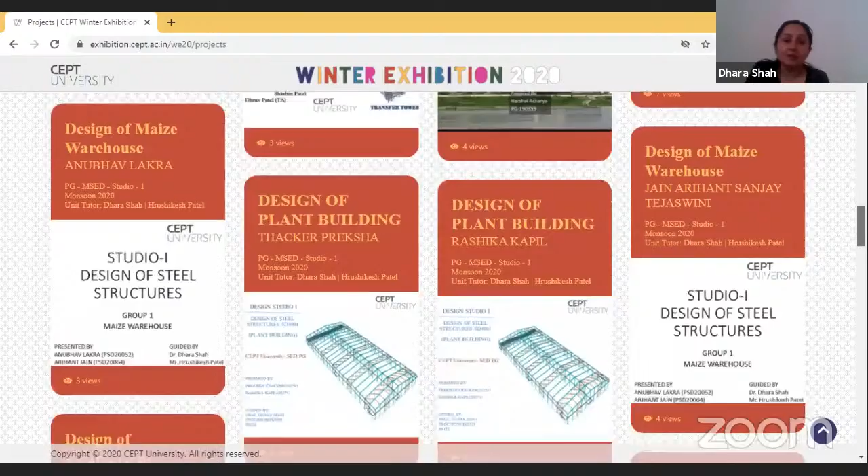Let me just brief out the objective of these two studios. Starting from semester one, studio one has been aiming to provide the students with knowledge and skills to design basically industrial steel structures with the latest Indian Standard Code of Practice for general construction. Students apply their own knowledge from strength of materials and structural analysis for further understanding between analysis, selection, and design of structural steel elements and their connections.

So basically, the project is given in a group of 2, wherein students are supposed to read the architectural drawings, prepare the structural system, and then calculate the loads going onto those industrial buildings, and then load combination analysis and design, as well as preparing the structural drawings, I mean the fabrication drawings, which are going to speak on their behalf onto the site. So the first semester is basically dedicated to design of industrial structures, and a few of the projects also included gantry girders. And so let us begin with the student Anubhav.

Anubhav, are you there? Yes ma'am, good morning. Yeah, you can share. Anubhav is from first semester who has gone through Studio One. So he will be presenting what they have gone through in Studio One.

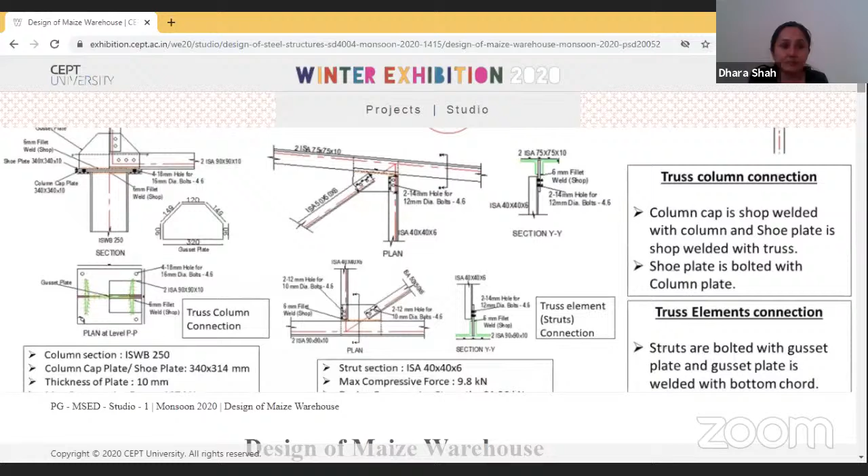Good morning, everyone. We are here to present our work done in Studio One. Me, alongside my partner Arihant, were assigned to design a maize warehouse, and during the course of our project we were guided by Dhara ma'am, Hrushikesh sir, and our TA Poojan Patel.

We were assigned to design a maize warehouse at location Ahmedabad, and we have been provided the architectural plan of 20 by 100 meters for the same.

Our location was Ahmedabad, and seismic zone accordingly is 3, and wind speed was 39 meters per second.

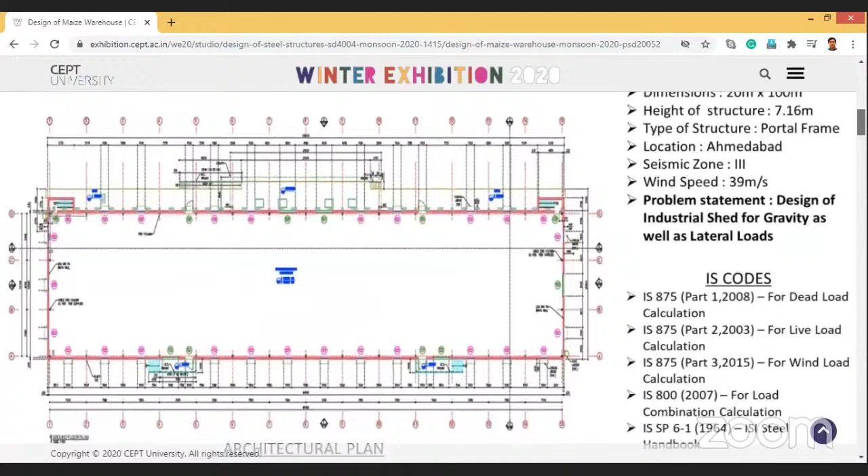As per the architectural plan, while preparing the structural layout, we first needed to carry out the structural layout for the same, keeping in mind various critical openings such as door at the gable ends, shutters and windows. Accordingly, we placed the columns at equal distance, that is 7.08 from grids and 7.114 at the gable end.

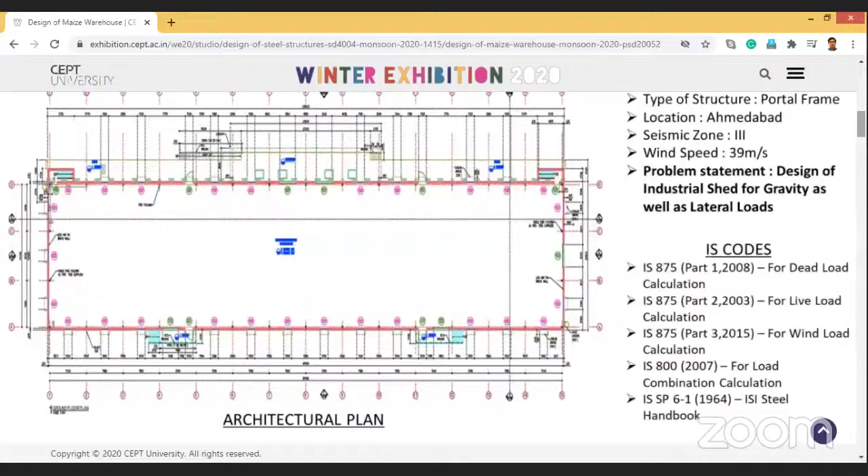For the same, here we have shown our center line plan at the base level, at the eave level, where we have tie beams connecting various portal frames, and bracing and purlin position at roof and gable end.

We can see here our center line plan at base level, at eave level, and bracing and purlin position in the plan accordingly.

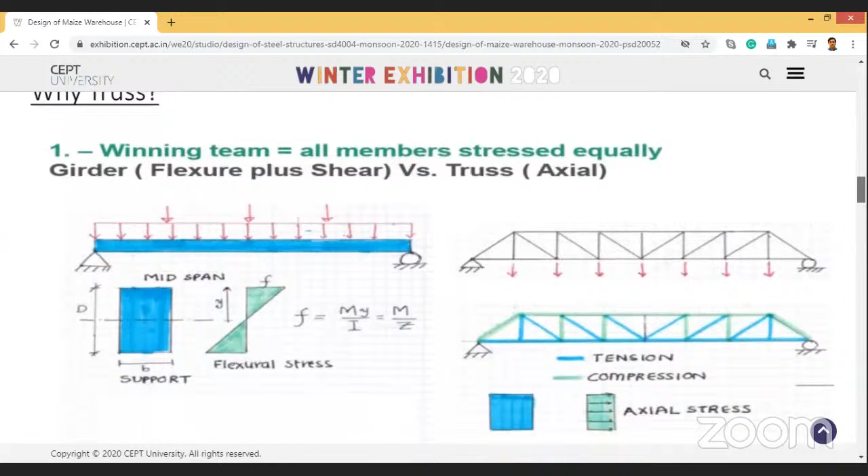Now we were asked to make some changes from our provided architectural plan, so we went for truss rather than a portal frame.

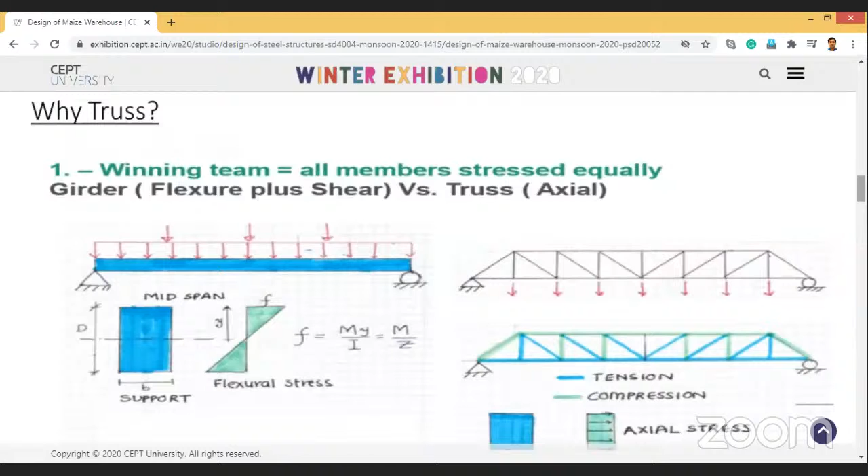The main reason was that for a normal portal frame girder, when it is subjected to a load, it experiences maximum flexural stress at mid span, as we can see in the figure over there in the diagram.

However, in truss, all its elements take up either tension or compression, and hence its axial stress distribution is uniform, which can be seen over here. So all members act as a winning team, and therefore we have opted for truss. Also, truss is lighter compared to a portal, hence it would be economical for larger spans, as in case of our project.

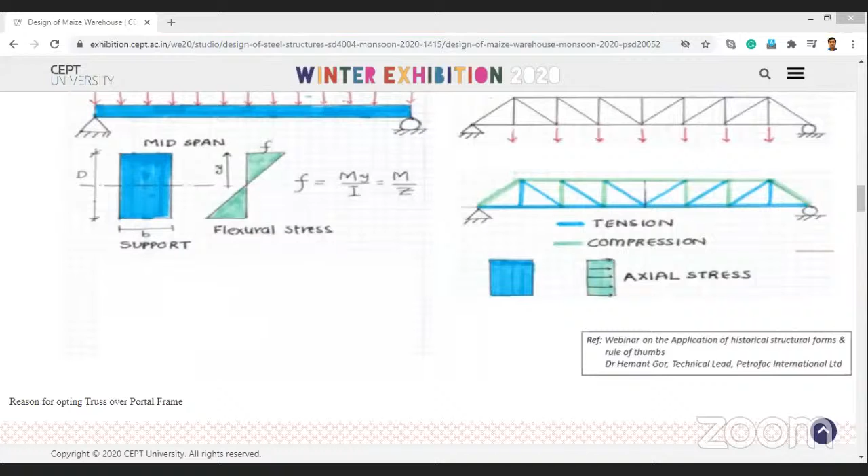Next slide, please. Further, we needed to calculate dead load, live load, and wind load.

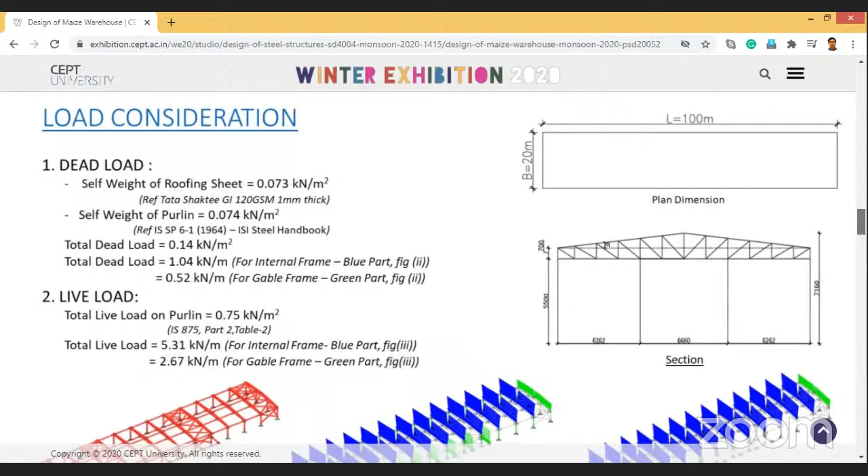We have taken the self-weight of GI sheet used in our project from Tata Shaktee and calculated the same. For live load, we have used IS 875 part 2 and calculated the same, and these we have depicted in our STAAD model also, which can be seen over here.

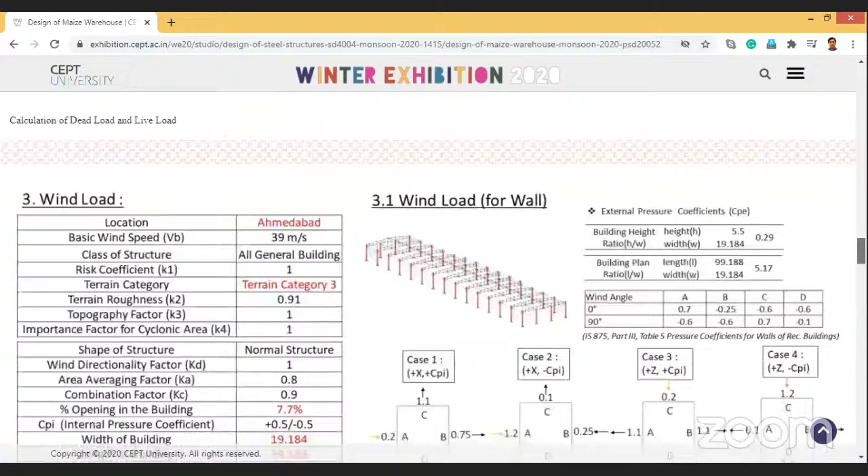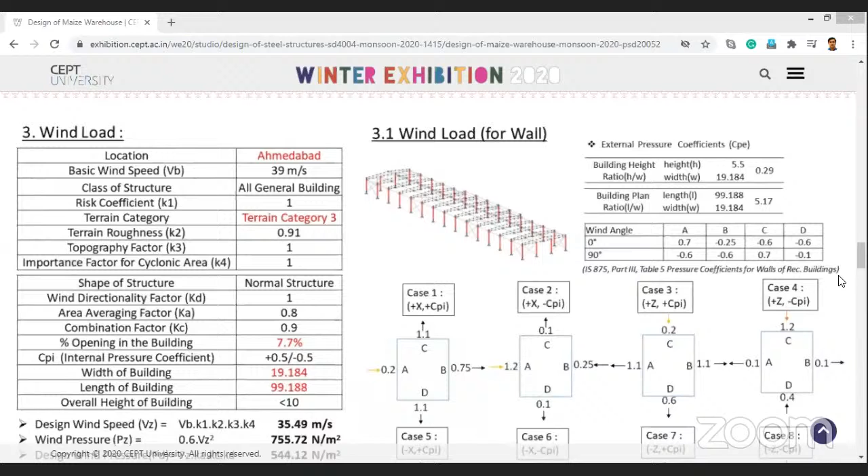Next, we calculated our wind load as per IS 875 part 3. All factors are considered as per IS standards, and we have depicted the wind load distribution on wall as well as on the roof.

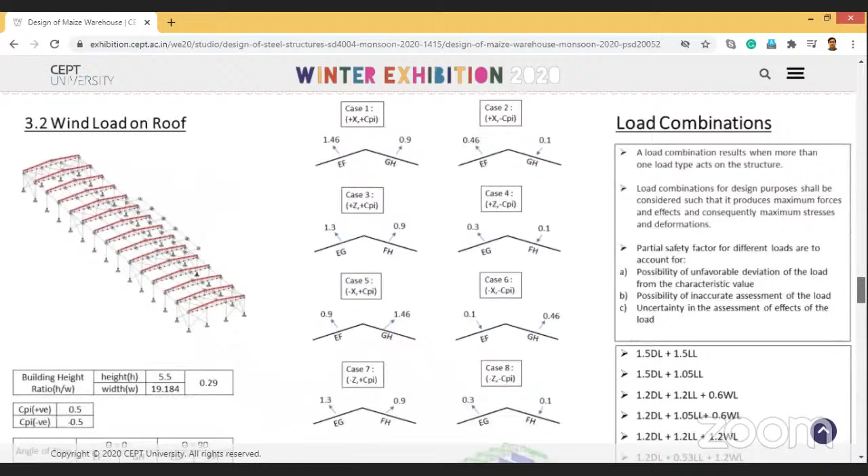Similarly on the roof, and there are the load combinations shown on the right side, which have been used in our structure. Then the design philosophy.

Basically, we have designed our column as per IS 800 2007 section 9, and bracing and truss members using IS 800 section 6 and 7.

The columns are designed for combined compression, tension, and bending, wherein bracing and truss members are designed as compression or tension member depending upon whichever force is higher, and checked for the remaining force.

We have used ISWB 250 for the column and 2 ISA double angle 60x60x6 for bracing, and all connections are shear connections and are designed as per section 10 of IS 800.

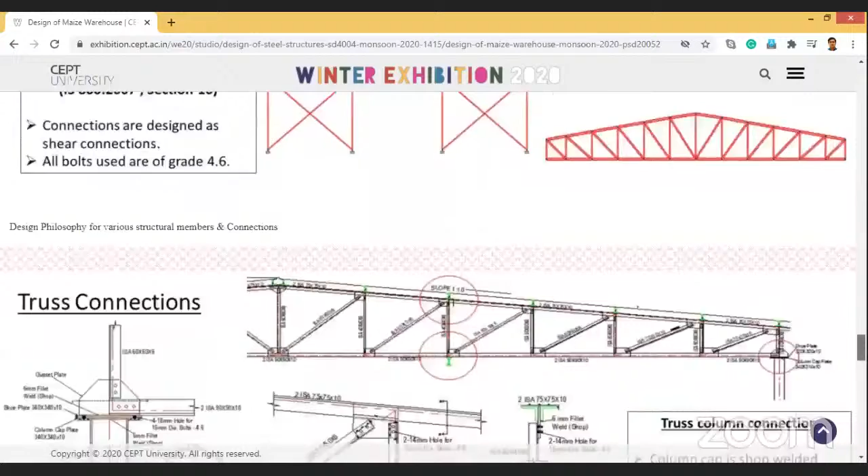Here we can see how we have designed our truss connections. We have used column plate and shoe plate to design our column and truss.

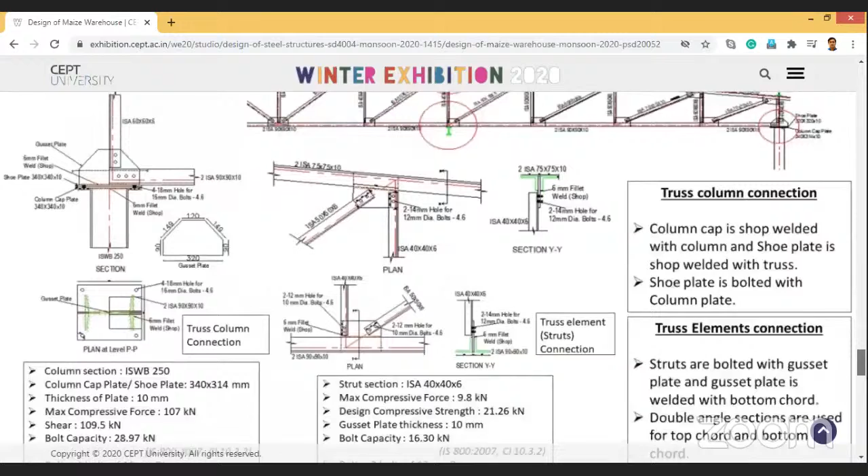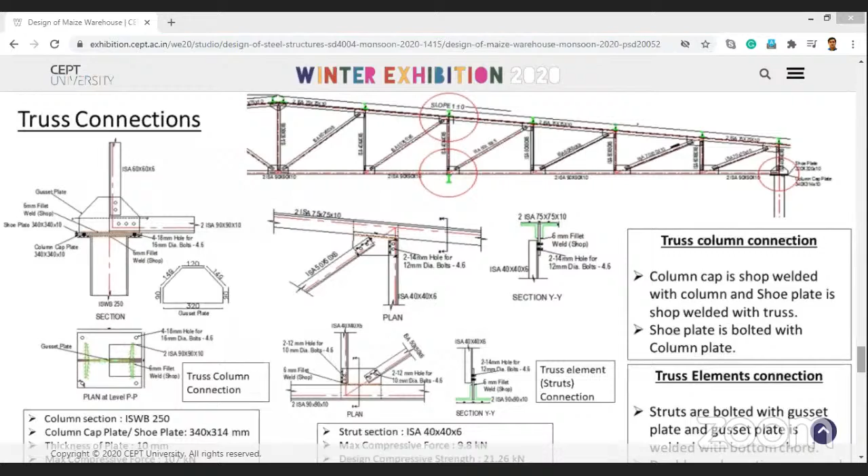Our columns, as we can see, were ISWB 250, and the column plate accordingly came out as 340 by 314 mm. We can see one of the types of connection over here.

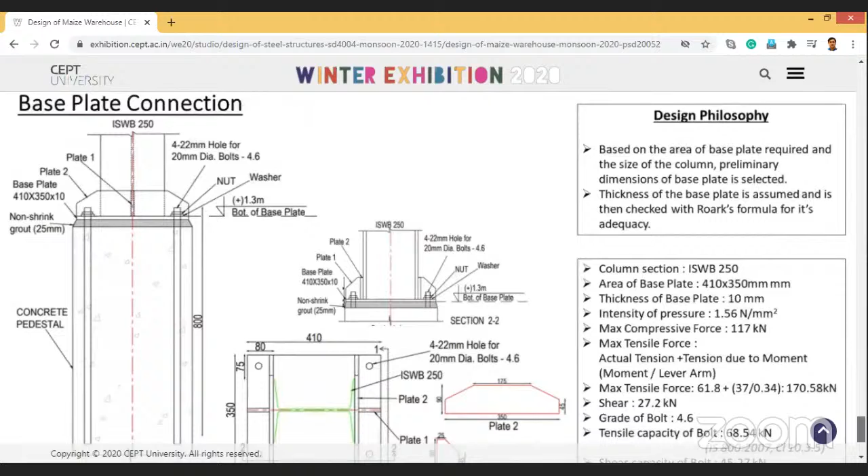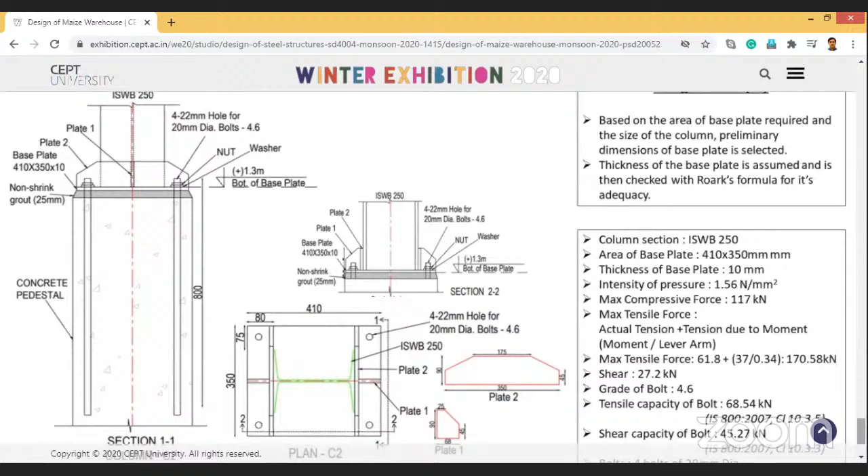Lastly, base plate connection. The base plate philosophy depends upon firstly assuming the area of the base plate, according to the size of the column and the dimension of the base plate, and the thickness of the base plate is also assumed and checked with Roark's adequacy formula. Thickness depends upon the intensity of pressure on the plate.

As we have a column of ISWB 250, for which we get the reactions from STAAD which have been depicted over here, we have accordingly designed our base plate also. Thank you.

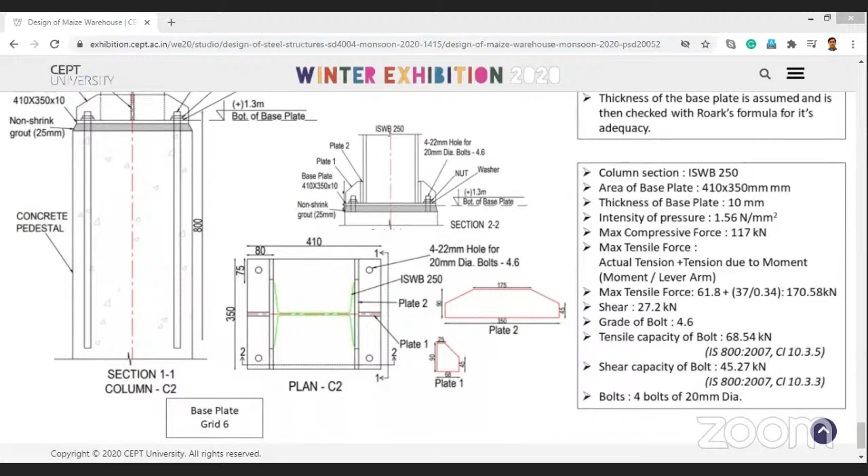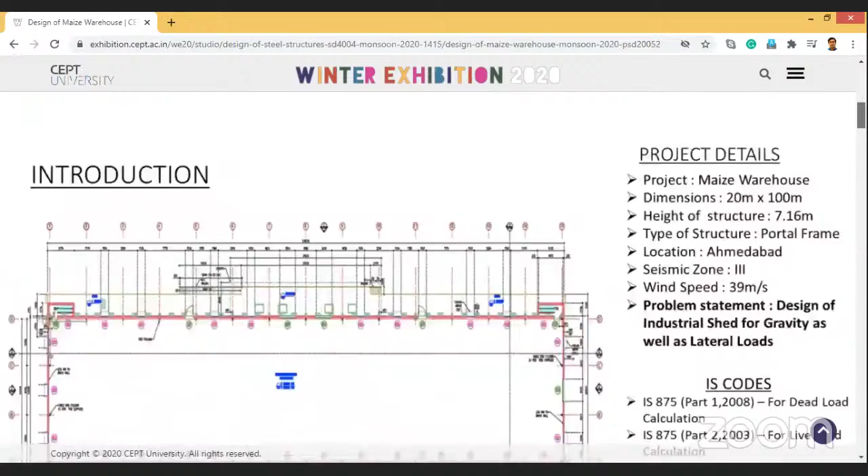Thank you, Anubhav, that was really nice. Dhara, we have another student, or would you like to take it forward with a couple more projects?

We have one more student from third semester. This was regarding the first semester. The third semester students are having heavy duty structures and some special structures like bunkers and silos in their Studio 3, which they are supposed to analyze, design and detail. So we have a student from third semester who is Dhruv Patel.

Dhruv, can you hear me? Yes ma'am. Can you just start with your presentation? Just guide Hemant. Design of industrial structures, Dhruv Patel. It's in the third row I think, go down. What's the name, Dhruv Patel? Yeah, it's second row here, this one. Yeah, you can slide down.

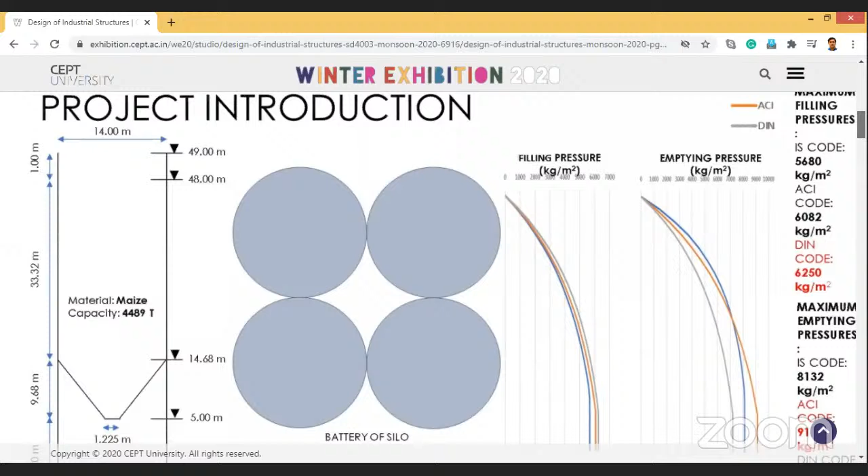For the silo project, please slide down. I was assigned a battery of 4 silos in a square pattern. These are the configurations of the silo: 14 meter in diameter and 49 meter in height. And these are the pressure calculations manually done.

After calculating pressure, it was applied in the STAAD model, and different load cases were generated, like one silo full, 2 silo full, all silos empty. Based on the STAAD result, silo walls were designed based on stresses obtained from the STAAD model. Silo cone was similarly designed for all-silo-full case, so it will take care of all the load combinations.

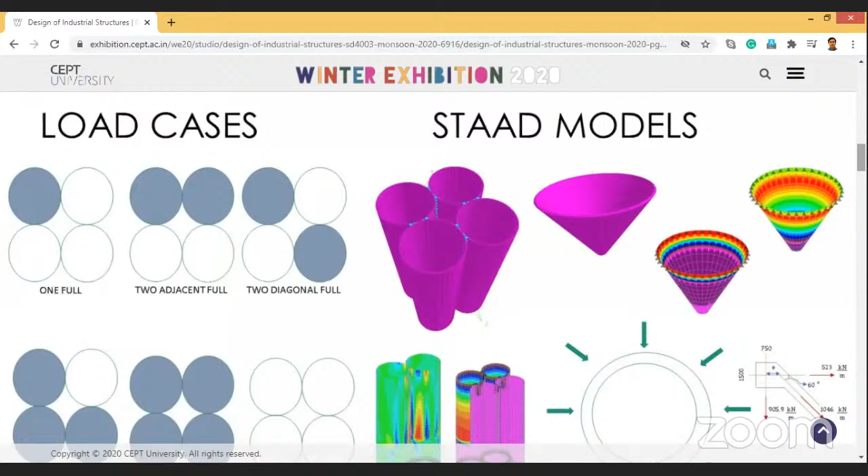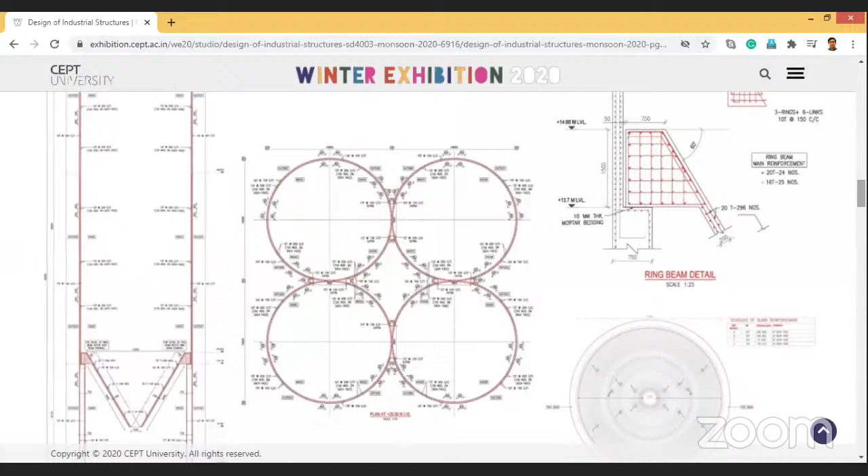This is the ring beam design, done for hoop compression and torsional moment. For that, all the steel and reinforcement was calculated, and this is the detailing of the silo project.

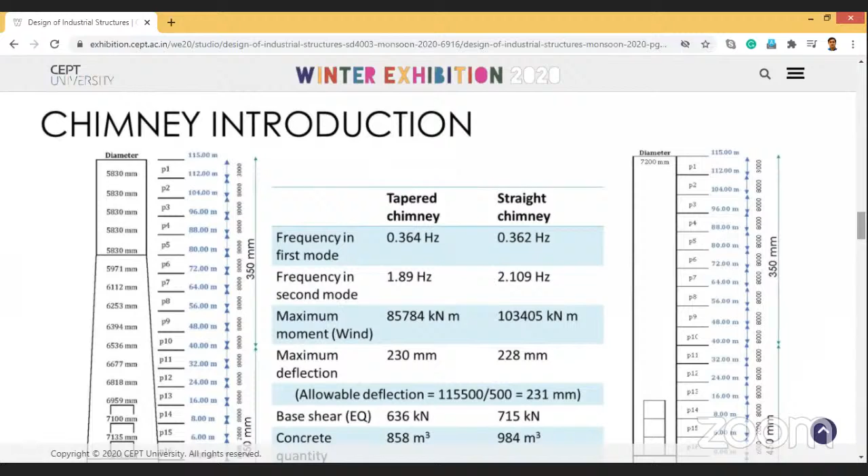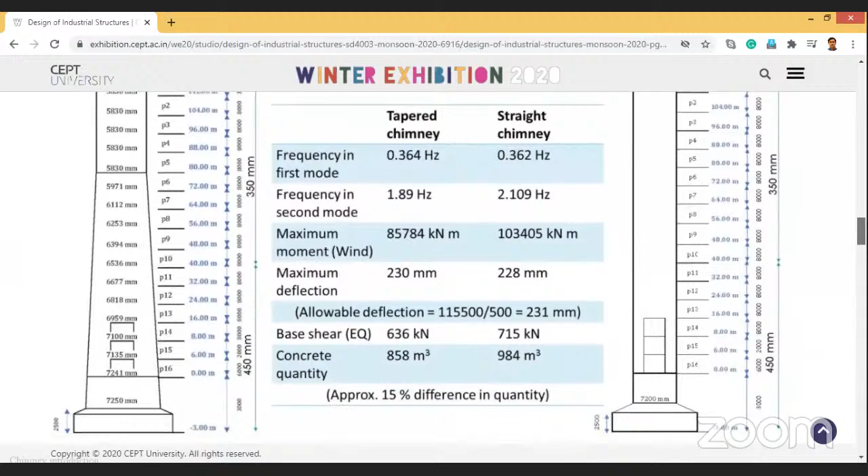For the chimney project, we were given chimney height and location. Based on comparative analysis, we decided which chimney is better for construction and which is economical. In my case, it was a tapered chimney, which was economical compared to a straight chimney. This is the comparative analysis between straight and tapered chimney.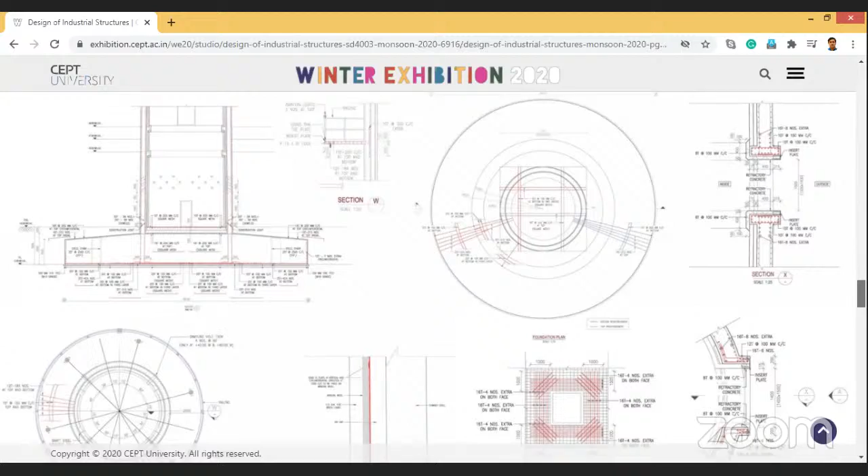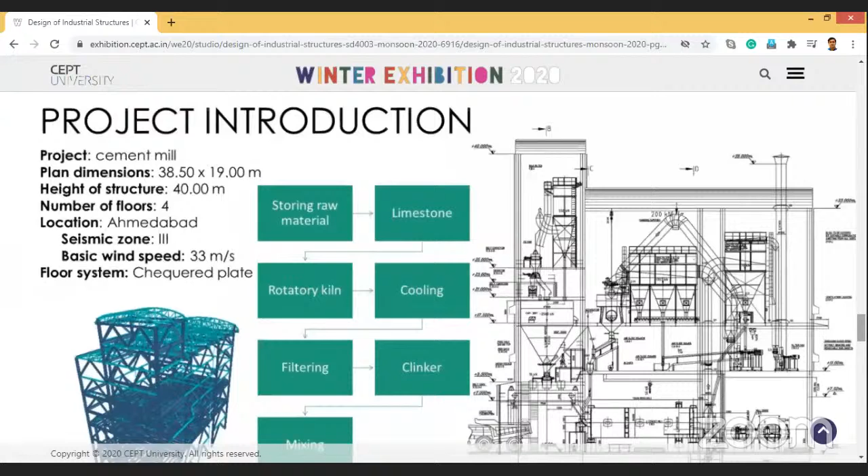For the industrial structure, I was assigned a cement mill project. For a cement mill it is necessary to provide larger spans, so the challenging part of this project was the very large span - 13 meter by 15 meter, 11 meter by 15 meter, different kinds of spans. Working with larger spans means you have to control deflection, and loading is quite high since industrial structures are heavily loaded.

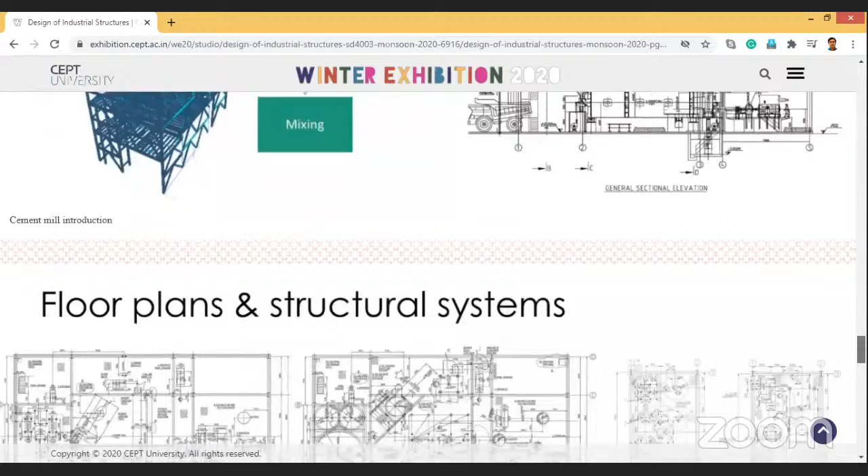These are floor plans of various levels, and based on that the structural system was decided. Plan bracing was provided to take care of the rigid diaphragm, because this plant has chequered plate as the flooring system, which does not provide a rigid floor diaphragm.

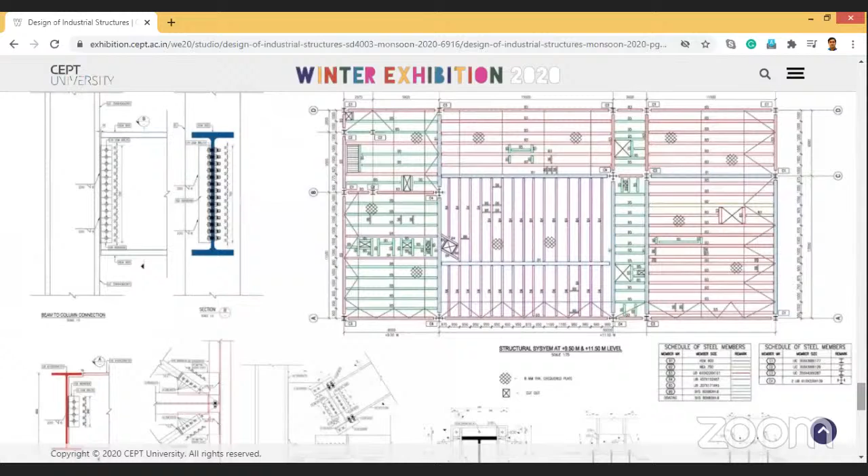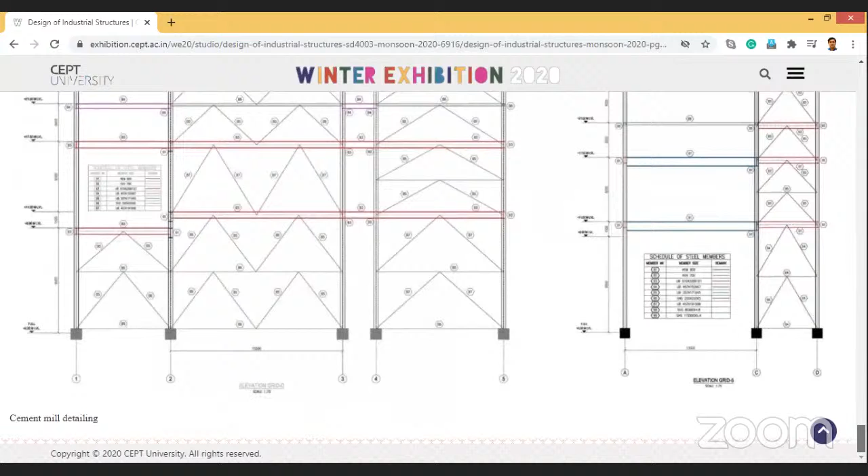Based on that, STAAD models were prepared and design of all members was done in STAAD, then checked manually, and detailing was done accordingly. These are base plate details, connection details and all that, and this is the elevation showing how the bracings are provided. That's all, thank you.